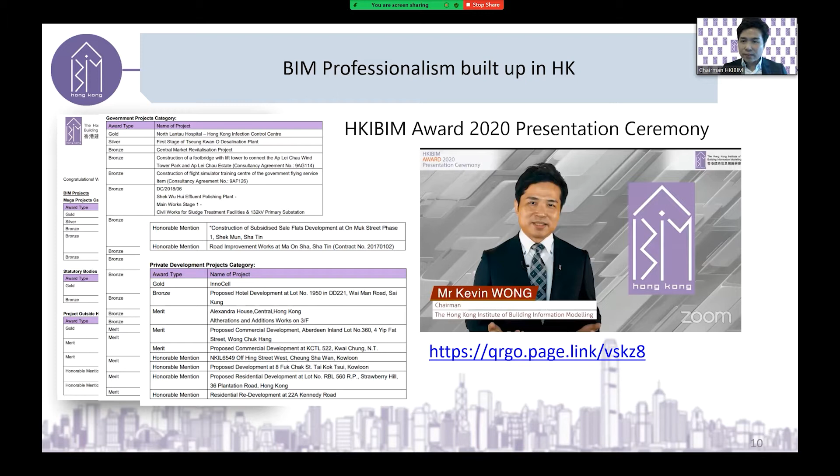This year we have a new application, so we call for applications now. We have a new award, the AEC Consultant Award, and also an Outstanding BIMer of the Year. If you think you are passionate in BIM, please apply, we are waiting for you. The nomination deadline is 26th of November, so hurry up.

We also provide continued professional development for the BIMers, with different events, so please have a look on our website and also our email.

Our board members this year: myself as chairman, my vice chairman engineer Dr. George Wong, honorary treasurer Dr. Jack Cheng, and honorary secretary Guan Tin. For information, Guan Tin is today's speaker as well.

I have initiated 5 departments this year: head of membership Benny Liu, head of training engineer Owen Lee, who is also the organizer for today, head of events and marketing Simon Ng, head of technical Ken Mo, and head of conduct engineer Francis Leung. We also have board members Monica Lau, Flocky Wong, who is one of our speakers today, TC Low, and Marcin Clausen.

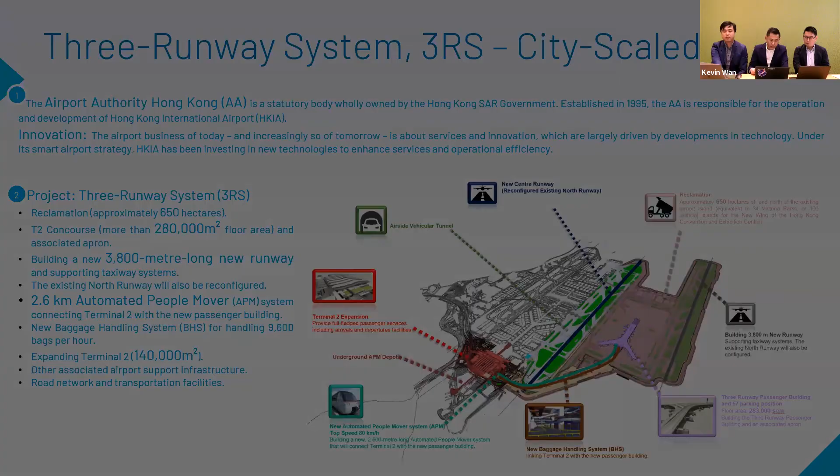I'll start with the philosophy of really focusing on people. From the client perspective, we are always concentrated on appointing, identifying, and then training our own internal teams. In terms of design or construction management teams, we have to start appointing all of these champions and train them.

A lot of these internal training materials we have planned out and crafted just for our design and construction management teams to be able to utilize any of these 3D software or online collaboration platforms to open up the BIM models and start reviewing it. So they are all beginner courses.

So we were taking the training, and then we were able to set up our own BIM training center, which is inside Terminal 1. Immersive cave systems, these were all generously borrowed from our IT departments, and associated video walls that we set up on site.

We have also designed and constructed our big rooms or war rooms on the construction sites, aiming to bring all the consultants and contractors to sit together inside the room and start to find the optimal solutions through visualization of all these 3D models and technologies.

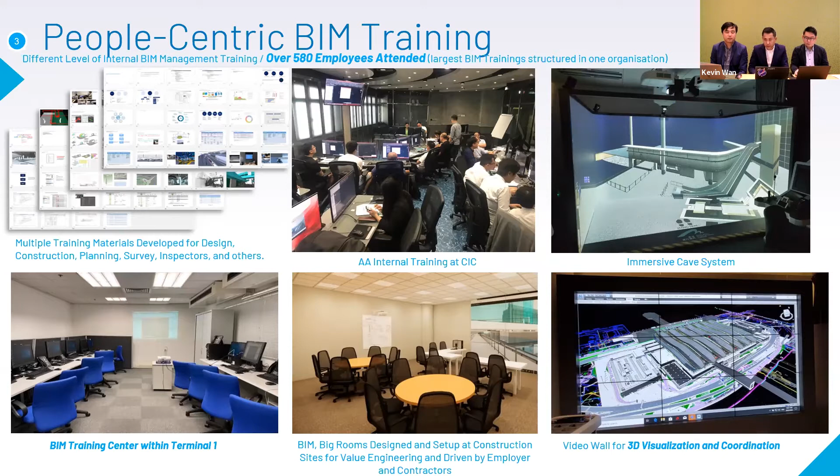For the start of every project, I believe clients really, one of the key options is to look into setting up the BIM specifications and standards. There's a lot of these BIM specifications and standards - there's local standards, there's also international standards around.

But what we have experienced is that in 2015, we engaged an external consultant to develop our BIM specifications and standards. These documents have been subsequently refined to reflect what was being stated in the technical circulars issued by the works bureaus.

And then for some of the LOD matrix, this is for the aviation industry. This is quite different from the BIM standards in terms of the LOD matrix, the level of developments, which is not easily referenced or found in local standards or international standards. For example, for baggage handling systems, how do we define the level of developments? This is something that we have to work by ourselves and start defining.

Item 6, in terms of contractual requirements, as a client, we have to be wary what we are trying to procure - the BIM scope of works to be delivered by the design consultants or the contractors. The scope has to be easily achieved by the consultants or contractors with adequate support.

We've got to consider how ready the market is in terms of milestones. How do we ensure that when the consultants and contractors hit particular milestones, they are submitting the right BIM deliverables back to the clients? We are mandating them to implement BIM, but have we really looked into what kind of BIM deliverables we want them to submit? These are all questions I think clients have to look into, so we can better manage or even assist and support our consultants and contractors.

Local standards, for example CIC and also all the technical circulars, including international standards like BSI 19650. So that's going to be a big exercise for us to align our BIM specification standards towards all these.

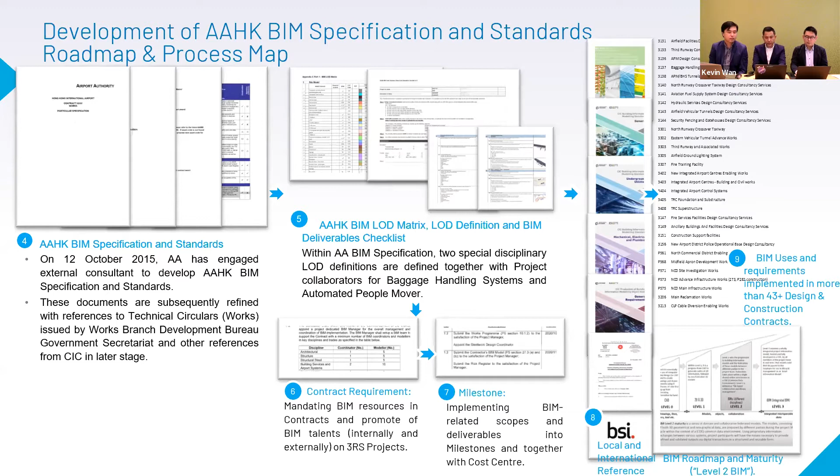Local and international standards. In terms of process mapping, I want to bring this up specifically to map how 2D flows and 3D flows are going to be brought into the projects. There's always confusion - we've experienced a lot of confusion whether 2D is contractual or whether 3D is contractual.

This is the key reason why we always map out, even for mega projects, each of these interface contracts - we have to map out the process of how the BIM models contributed by different design consultants get aggregated, how they get passed on to the contractor when awarded, where changes happen, who's responsible for updating it, who has access to the ultimate federated BIM models, where we're hosting this data, and what are the roles and responsibilities of the in-house client's BIM team versus the scopes for consultants or contractors' BIM teams. This all has to be mapped so the design and construction management teams are able to understand.

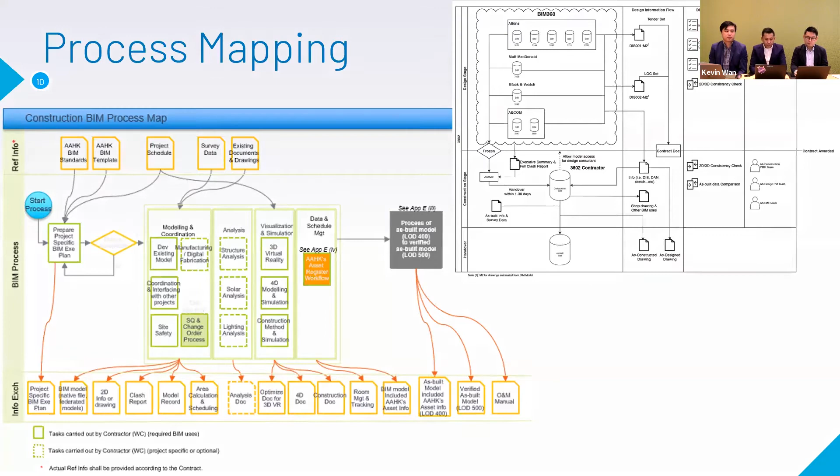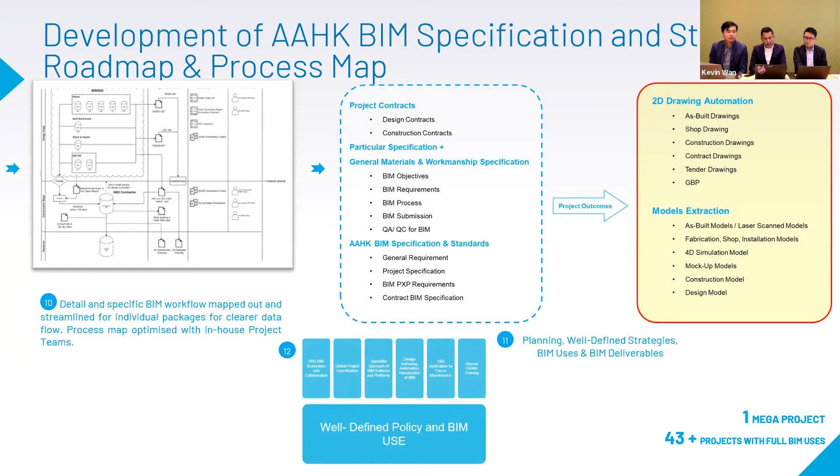Nothing complex - the process map has been around in the market for some time. With the map process, in terms of contracts, we define whatever scopes, requirements, and key objectives. So with fingers crossed, we're hoping for the best outcomes and the best BIM deliverables to be delivered to us by our consultants and contractors.

2D drawing automation is always something we hope makes the 3D models and 2D drawings consistent. We're going to be realistic - we're not generating all the 2D drawings from the BIM models, but there's a minimum amount of effort and a minimum percentage of drawings - general building plans, key sections - that should be generated from the BIM models. We have to ask ourselves what kind of drawings: shop drawings, fabrication drawings, and different drawings used during the design, tendering, and construction stages.

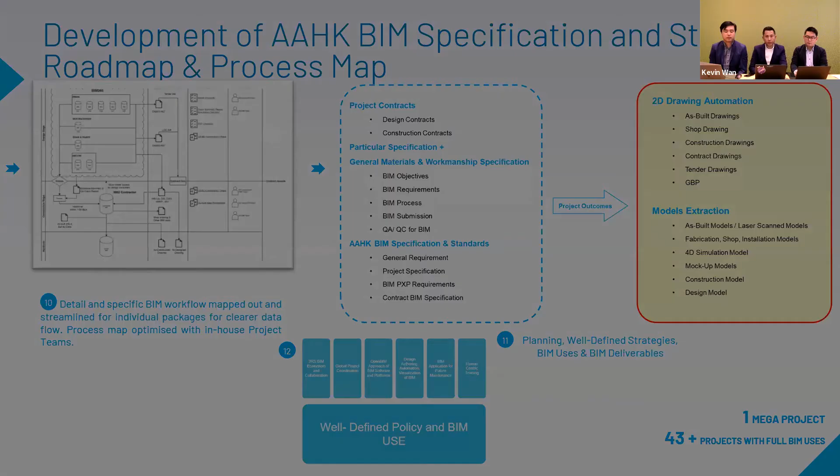With all of this map process, contract, BIM standards - these are our client-defined BIM policies internally. It works for owners, consulting firms, or construction contractors' teams. I think we have to start standardizing our own BIM specifications, our corporate BIM standards, and so on.

Some of the technological backbones and cloud technologies we are utilizing on our projects: Revit, Tekla, SketchUp, all the APIs, all the plugins.

Really, the reason for setting up a BIM team within the client is not really to micromanage every BIM team of the consultants and contractors. I think one of the key roles of a client's BIM team is to support the design consultants and contractors. We want to understand their difficulties and be able to hold hands together and start resolving issues.

So we'd like to look into a more open and collaborative process - this is something we really recommend all clients look into. Common CDE that we are adopting - nothing strange or too different from the market. We are using BIM 360 for all trades except structural steel, and we are using Trimble Connect.

For digital work supervision systems, this is another requirement issued by the Development Bureau a couple of years ago. We are adopting SnagR for DWSS - the advantages are paperless, user-friendly, and efficient. For the cloud works, they could just go out to site, take photographs of whatever pipe has been laid down on the construction site, do the invert levels using traditional or advanced surveying methods, and then start uploading the images onto the platform itself.

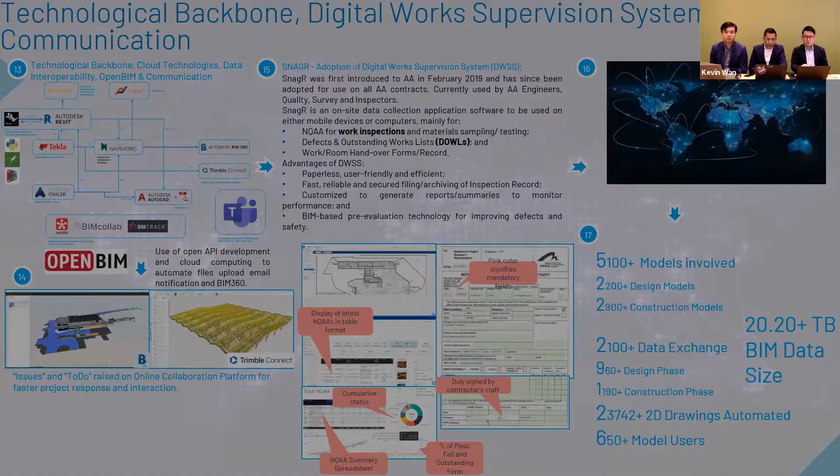BIM uses construction simulations, 4D simulations, engineering analysis, construction documentation. In terms of all of these BIM models, we are looking into how these 3D BIM models can be extended from the design to the construction phase, right?

We have to look for different scopes. For example, analysis that requires 3D joint generations from the BIM models or automations, for visualizations and shop drawing generations for MIC or DFMA, using the BIM model data itself for robotic total stations, setting out 3D control and plannings.

BIM-based quantity extractions, for materials that we think will be mostly remeasured. It's just so hard to run through the 2D drawings and remeasure it there. And then site monitoring, as-is condition modelings, using 3D laser scannings.

These are all the BIM uses, and we definitely are adopting full BIM use for the projects, and clients from the senior management perspective. Although we want to adopt full BIM use, the BIM use has to be practical, right?

It has to help the project teams in terms of project delivery, in terms of time, and how easy the contractor is going to use it to deliver their works.

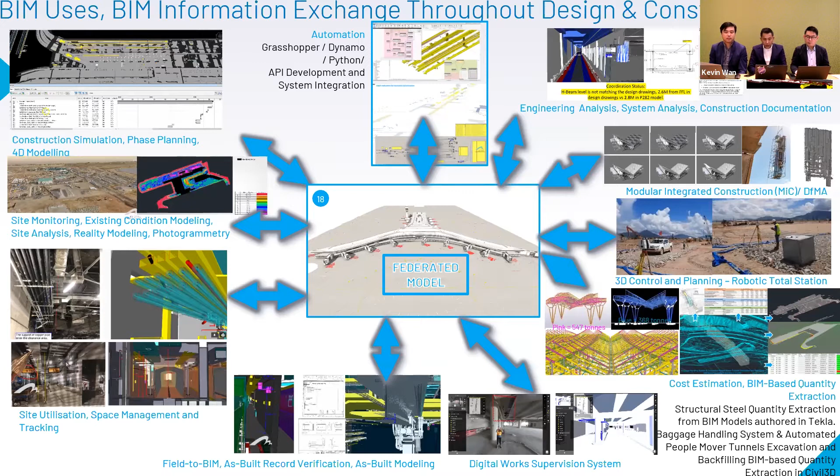BIM-based cost estimations. I think what we have seen and experienced is the majority of the models are being used to calculate the excavation volumes, the cut and fills, and steel quantities, where these steel detailings and the quantities are going to change, right? So this will all be measured, and I think one of the key strategies is to really identify a trial area or a key area.

If the clients are wary of doing full implementations of BIM, the recommendation is to really look into a trial area to start measuring the quantities of a certain material. And that material often requires us to remeasure in the construction stage.

So, for example, steel has to be remeasured. So it makes perfect sense to really measure it in 3D and export these quantities.

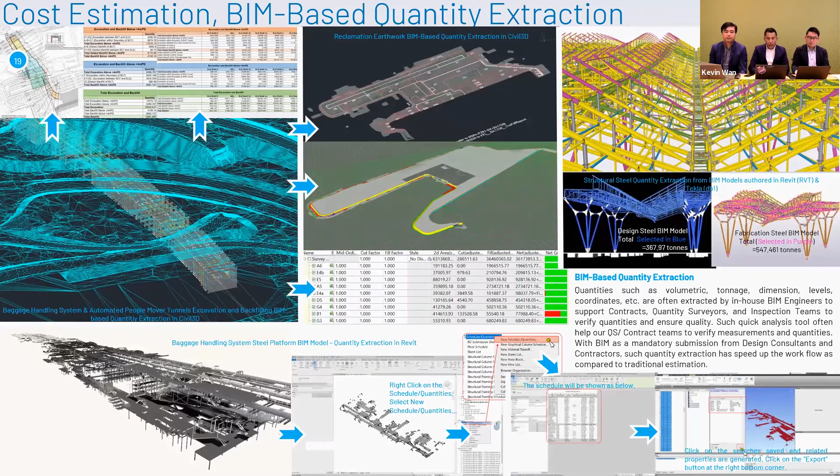In terms of this BIM model, all our great BIM modelers are putting effort into building really good models. How are we going to bring this data out to the field to help our contractors, right?

So one thing that we are hoping to see the construction teams do is implement machinery controls, how they input the data from the output of the BIM model itself and then import it into these machine controls.

So for example, one example of this is the BIM model itself is done in Civil 3D, and this Civil 3D was used to generate grading plans, cross-section drawings, elevation drawings for each layer. So this BIM corridor model was being used and imported into these machine controls and these paving machines, right?

The hardware itself comes with all the sensors, all the radio with all the right frequencies. Again, you need a universal total station to make sure that the paving machines are working in the right alignment. There's also targets that has to be installed. So this is the basic hardware for all the positioning systems.

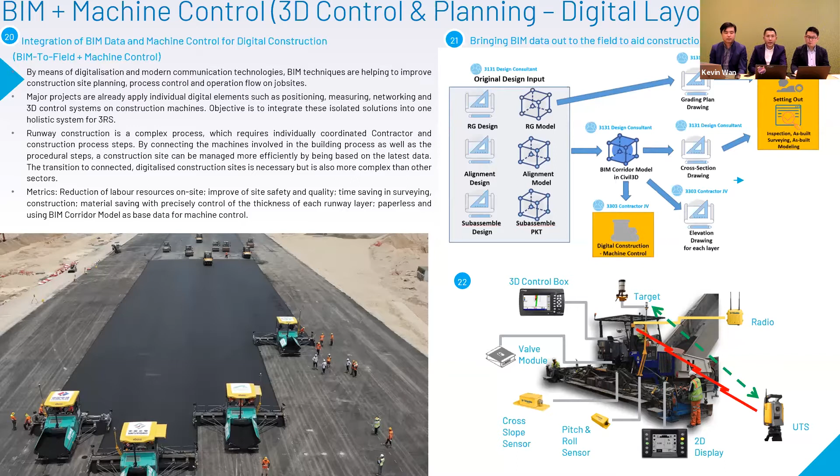This is what we meant by really bringing out the BIM data to the field to help the contractors. How do we capture the as-is conditions back to the office, right, to verify our design intent or construction BIM models, right? So again, this is what we are using laser scannings to verify.

There's also a lot of effort that has to be inputted into implementing laser scannings. One, you have to do site survey and data acquisitions. Once you're done with the survey teams, you have to bring the data back to the office. You have to geo-reference it. You have to process the point cloud, and then start overlaying the point cloud models to the design models. So again, this requires manual operation of bringing out the equipment to the site for laser scannings using different targets.

There's also a requirement of software and hardware to process the point cloud models and then overlay it. So we've got to understand the workflow, and definitely the construction teams and contractors are putting effort into this. Reality modeling, nothing new.

This is just another friendly technology for using drones and photogrammetry. But FYI, it also requires quite a lot of resources to put all of this model together, to stitch all of this data so that we can visualize it.

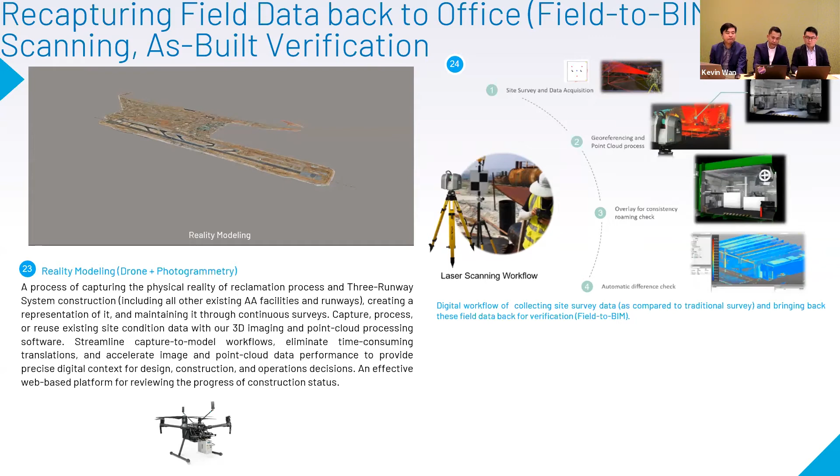In terms of underground utilities, this is mandated in the projects so that we can verify the models. We're not looking for millimeter precision - I think with enough tolerance so that geometrically the elements are there. We're just checking whether the elements are there.

And on item 26, with the workflow of showing all the point cloud models - why are we collecting all of these point clouds? There's actually an intention to use it all the way for GIS and asset management, which will be covered by Floki in detail shortly.

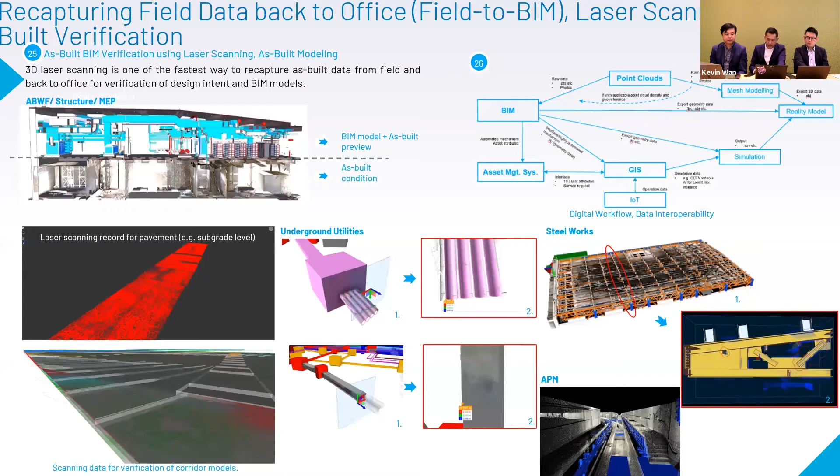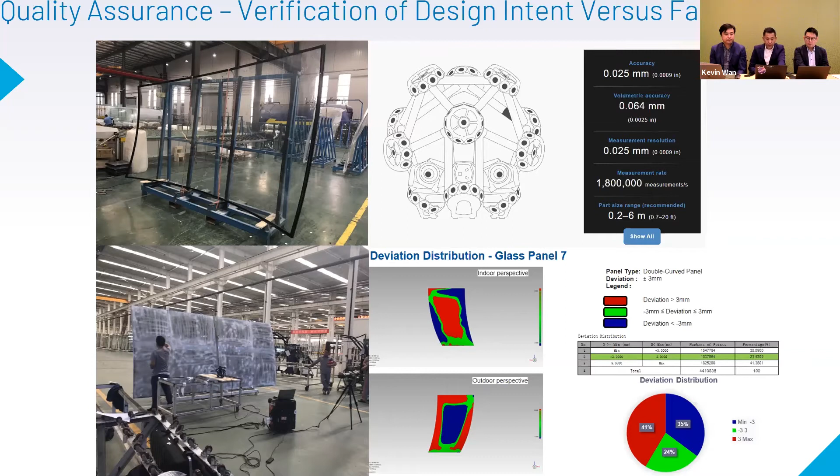Other quality assurance we can look into is recapturing the data using laser scanning - high precision laser scanning for specific construction materials where we want good geometric control. Once this is collected from the fabrication stage, we can use it as a QA/QC method - for example, the glass and glazing for curtain walls. Before it gets shipped out from the factory, we can double check whether the geometry fits into our design intent. This actually helps us save costs rather than shipping out glass from the factories.

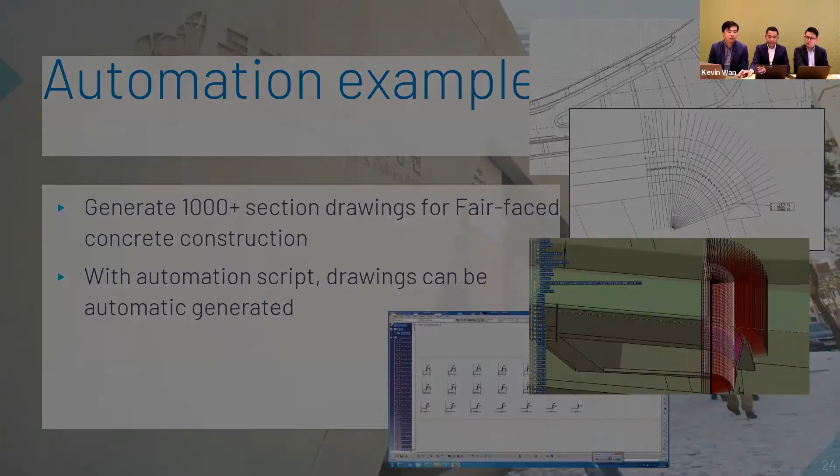So the contractor on site could have very accurate drawings and fabricate those formworks, then construct the fair-faced concrete on site. We had a script to automatically generate those drawings, so no matter if they changed the design 10 times or 1,000 times, it didn't really matter because we already had the full workflow and scripting to automate those operations.

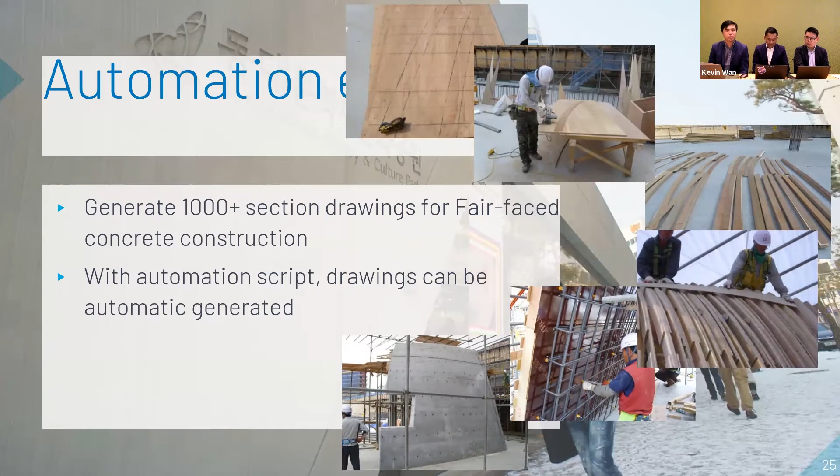The second project I want to share is another from Zaha Hadid, located in Changsha, China - the Meixihu International Culture Center. Same thing - digital models to fabrication. This time we were more advanced, directly fabricating those GRC panels using CNC machines to form the formwork. It's a step ahead from the previous project, but still using automation.

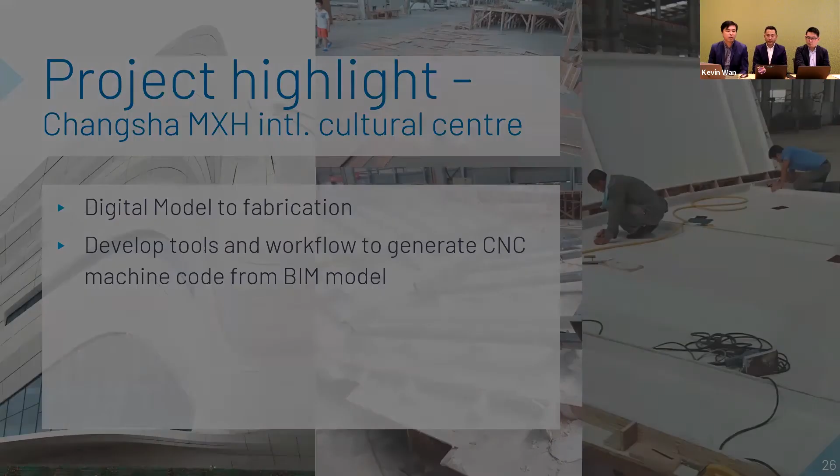As you can see, those digital information was directly fed into the machine so they were able to automatically fabricate those formworks in machine language - we call it CNC. So why am I showing these two projects? From my perspective, I believe automation, or the automated workflow, is the next generation of our BIM workflow.

The automation or the automated workflow is the next generation of our BIM workflow.

From my perspective, we only have two decades of the BIM industry here. Those software or workflows are not that sophisticated yet. Sometimes we have to reinvent or change some of the workflow to suit our project needs. Many projects outside of Hong Kong or internationally will develop their own workflow tools or automation to suit their needs. So I think as a BIMer, this kind of skill set is very essential for the times after this.

Let me start my topic, which is about the construction phase from the current perspective. First, let me introduce our team. We are more focused on the construction phase of the project, but we still have management from design, construction, and also the O&M stage, which Fokke will mention a little bit more about.

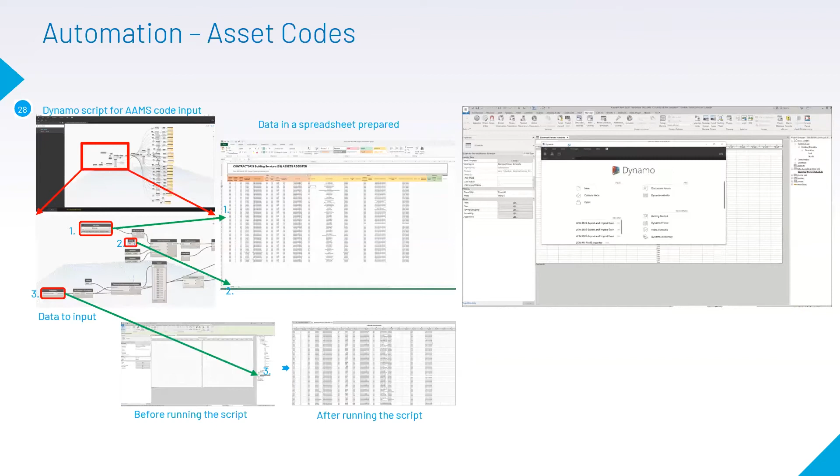Here is an example of the automation of the asset code, which was developed by the contractors. So we are not only working with our team in-house, we also help the contractor or the consultants do their things quicker, smarter, and more accurate.

Here's an example developed by the contractors with a script, as you can see, a Dynamo script to help input some of the asset management data into our BIM model, which is a very large amount of human text input. If we can automate that, it can save the contractor's time. Actually, it's not our time, but if they can save their precious time, then maybe they can use it in a better way to provide a higher quality output for us.

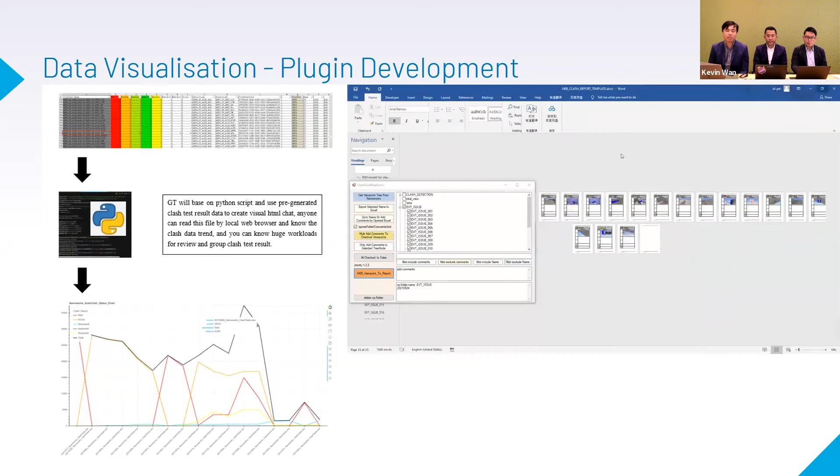Here's another example, which is we will generate those clashes' report, a viewpoint to automatically generate a comment sheet or report in Word format. It's the same philosophy - we believe that if we can help the contractor save their time and money, they may provide a better deliverable to us.

Cloud, tablet, and model. In the department we are also seeking new possibilities, which include not only software but also hardware. For example, those BIM stations - we all know they are very expensive with very high configuration. So we have an idea that it could be put on the cloud and shared by all parties to save the cost. Let's say if we have a very high-end computer for each member, is it possible that we can share the computer with 3 members, 4 members, or 5 members?

Or those people who are viewing the model in the department but not using it on a day-by-day basis - can we share that with them? Maybe 10 people share one computer on the cloud. So we are seeking the possibility of the virtual desktop. And also Holo Builder, one of the applications that works with mixed reality - we are also seeking this possibility for us.

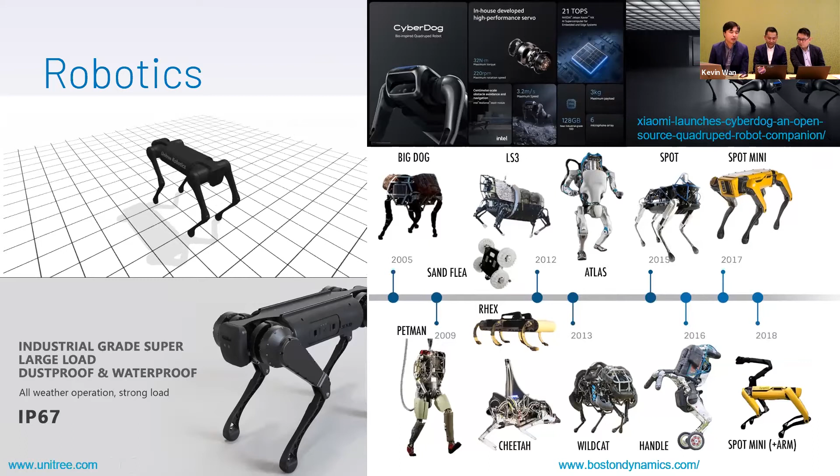Robotics, one of the very hot topics nowadays. Also from the China manufacturer Xiaomi, they have a new CyberDog which you can buy at a very cheap price, less than one private car's price, then have it at home and develop your own tools to help. For example, maybe they can do some investigation, sidewalk inspection, or some logging, etc. The possibility is unlimited, so we are seeking this new technology as well.

So the next topic is about in-house development. I would like to introduce 4 examples from our developments that we want to share with you guys.

The first one is about the Power BI clash report dashboard. Many people say, oh, Navisworks can do the clash, why do we have to do so many things and put it in Power BI for reporting? This is because from our BIM professional perspective, we truly understand what the Navisworks clash report means. But can the client understand? Can those colleagues without BIM knowledge really understand the Navisworks clash report and what it means?

Another problem is when top management looks at the project's clash numbers, usually the contractor or consultant will just report, oh, we have 10,000 or 100,000 clashes. That will really scare them because they're talking about so many clashes in one project, but actually those are just numbers - you didn't tell them what's the meaning behind those numbers. Some of them may not be important, some of them may need to be solved right away.

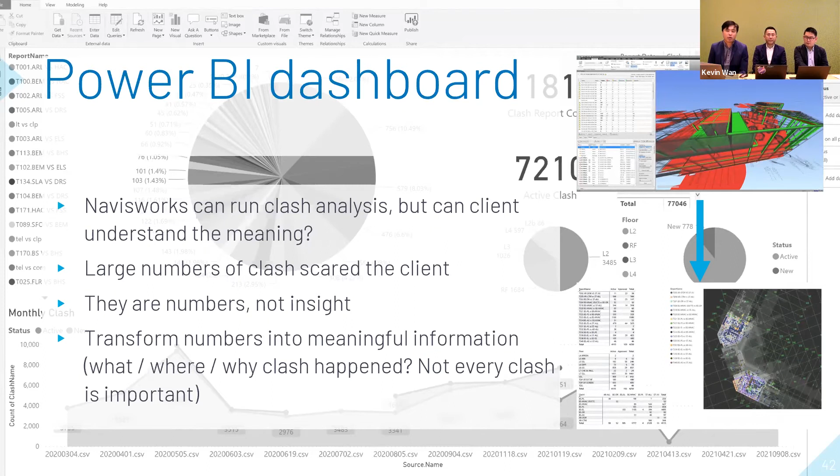So we are going to transform those numbers into a Power BI dashboard, where the parties can interactively look at the numbers and understand their meaning. For example, they can navigate themselves to see what discipline, what floor, and where the clashes are, in a very intuitive interface powered by Microsoft Power BI. So they are able to look into the report and see what, where, and why the clash happened, and which ones are important or not. They are able to do interactive reporting using Power BI.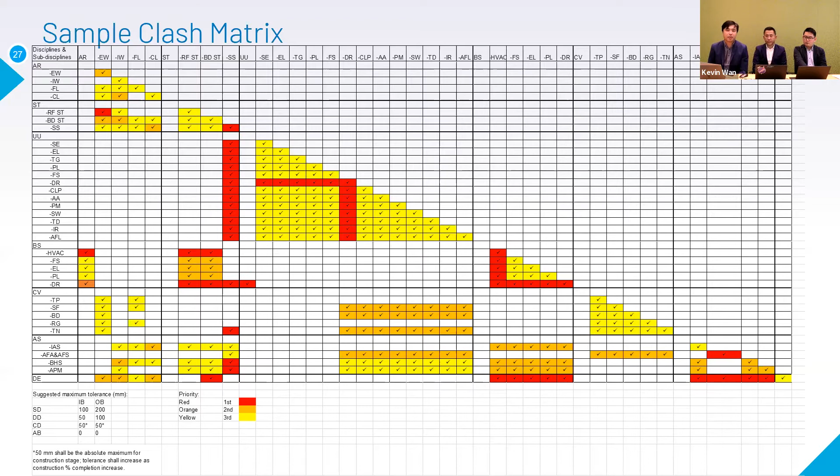And the tools automatically grab the Navisworks clashes and then generate a report, so our high-level management or the project manager, without BIM knowledge, can also understand what those numbers mean - not only the numbers, but the insight of the project.

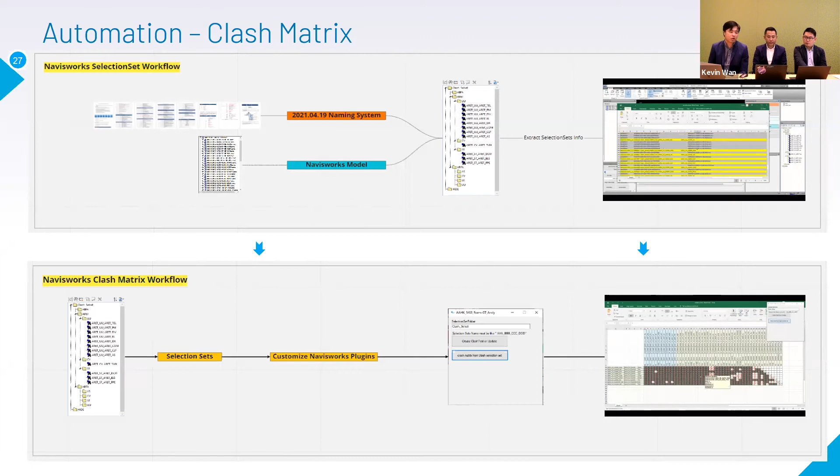The next stop is about the model comparison tools. The second question we usually ask ourselves when receiving the model from the contractor - we're receiving it on a bi-weekly basis - is what did they do? What have they done in these 2 weeks? Are they modeling in an appropriate way?

Because in the BIM world, we are promoting a parametric modeling methodology. So that means when you model something incorrectly, you should change the parameter, not delete the object and remodel it again, right? Most of the cases.

So we have in-house tools which check 2 versions of the model and highlight them with different colors. We can see which element was newly created, which ones were deleted, and the before and after of their geometry in the 2 versions of the model.

So from the model, we can tell a few things. First, how much effort they put into their model, how many objects have been updated during the time. Secondly, about the modeling quality - are they modeling using the proper methodology? We can tell about this. These are the 2 reasons behind why we developed these plugins.

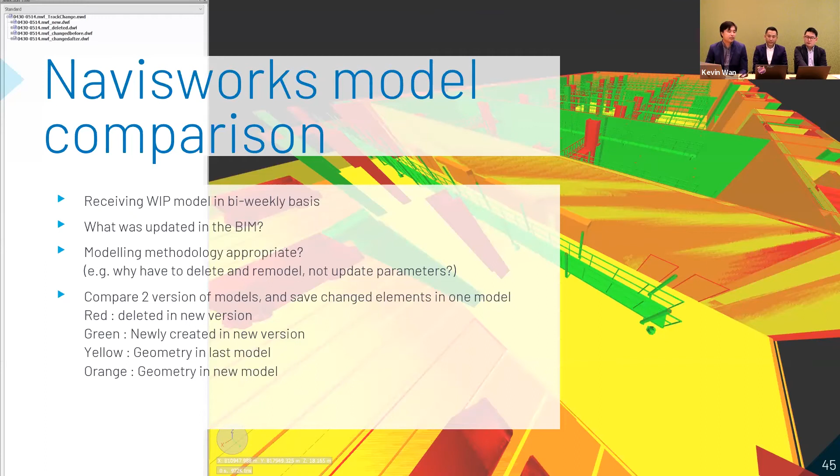Let's talk about CDE notification and synchronization. CDE, common data environment, is a very hot topic in the BIM industry for these few years. In our project, we have a CDE for each contractor. As I said, we are talking about 20 to 30 projects simultaneously, meaning they have 20 to 30 CDEs together submitting information to us.

So for us, it's not feasible to spend time checking their CDE to see any updates on them every day, on an everyday basis. This is the first problem we have encountered.

And the second problem is, if we only rely on the CDE from the contractors alone, we ask the question - what if their CDE fails? Here are 2 examples. The first one, some contractors forgot to extend their service, then the service was suddenly stopped, and we lost all the files on the CDE.

We cannot access them until they pay to reopen the account - maybe they can, or maybe they cannot, right? The second experience is that the BIM consultant on the project suddenly disappeared and closed down the CDE, and we lost all the files as well.

So these 2 examples brought our attention to the need for a solution or workflow where we have a backup copy or local copy ourselves, not putting all the eggs in one basket. So in-house, our team developed several scripts or workflows to work with the CDE.

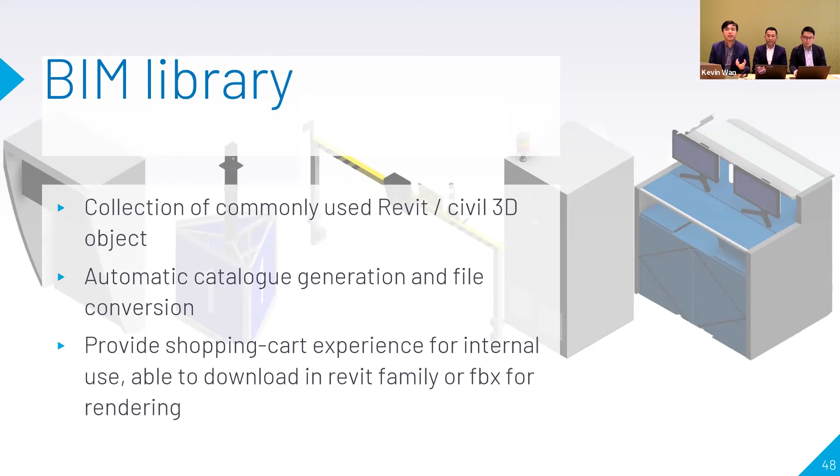And the second one is about Slack. It's a team collaboration tool, like a chat room. We can check in and talk about our daily work and the problems we encounter in Slack. We use this because we want to separate work-related conversations from private conversations, so we don't talk about work in WhatsApp.

And the last one is about Trello. Trello is a very important tool for our team because it's related to knowledge capture and sharing. In our daily work, we encounter many problems or questions. So when we find the answers or solve the problems, we log it down with Trello cards. So when we have new colleagues, or people encounter a problem, they can search it themselves and learn how to resolve it without having to deal with the problem again and spend a lot of time resolving something we already fixed.

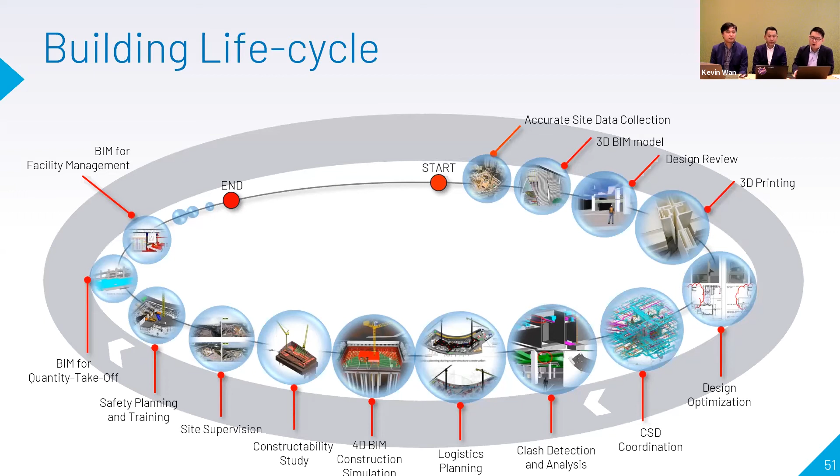We are talking about the building life cycle, and as you can see in the figure, the operation and maintenance phase takes a significant portion of the whole building life cycle. O&M includes functions, duties, and labor-associated activities of daily operation and routine maintenance - works such as replacement of parts, structural components, and other activities needed to preserve assets, so that the building continues to provide good service and achieve its life and reasonable maintenance costs.

To achieve this goal, facility clients commonly consider aspects like reducing capital repair, reducing unscheduled shutdown repairs, extending element and equipment life, and realizing life cycle cost savings.

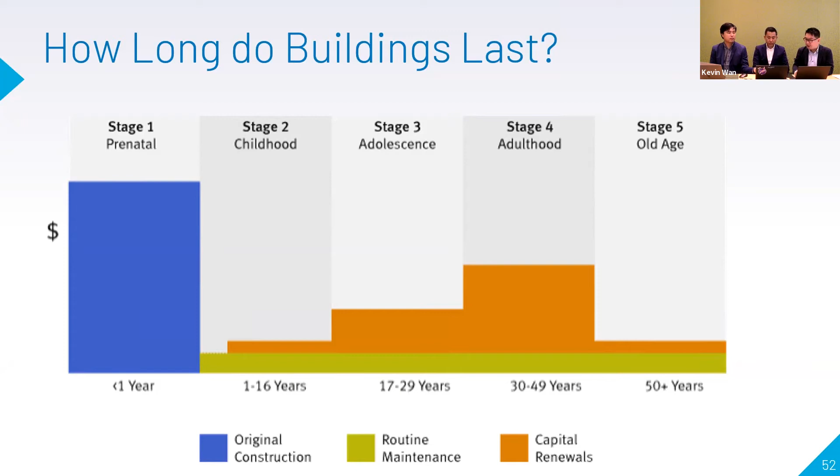Including Hong Kong, many countries in the world are considering the value chain of the built environment and making use of building information modeling and digital twin - the digital replica of the physical world - to enable assurance and feedback throughout delivery and services. For example, in the UK, the government established an Infrastructure and Projects Authority to manage policy, standards, process, and data from building construction to the built environment.

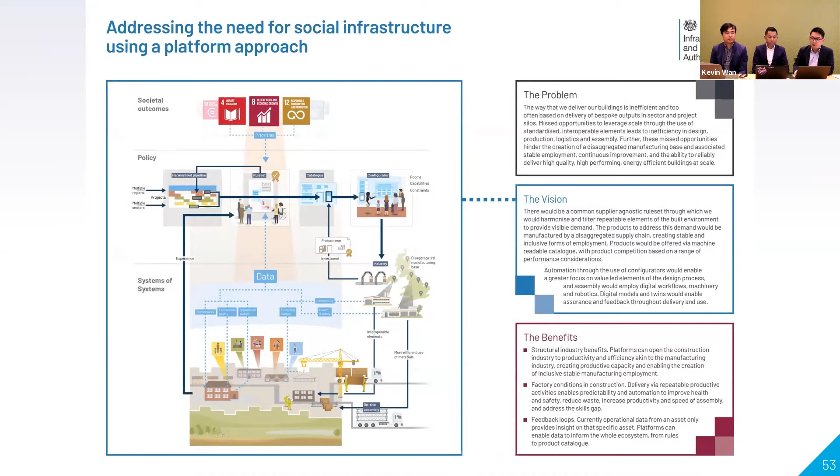Next I will talk about BIM in FM. In common practice, the facilities management team has to handle the building management system, which we call BMS. This also includes the central control management system and computer-aided management system, CCMS and CAMS. Another aspect is the asset management system.

You can imagine that in a building there are a lot of assets, and that asset information includes asset attributes, cost information, inventory records, work orders, spare parts, maintenance records, etc. If the client can make use of the geometry and information from the BIM model and associate it into a building maintenance management system, this integration enhances the usage of facility operation applications.

All activities associated with routine day-to-day use, support, and maintenance of a building or physical asset happen in the O&M phase of construction. The client representative shall be responsible for managing resources that affect cost and services, including safety, reliability, and performance.

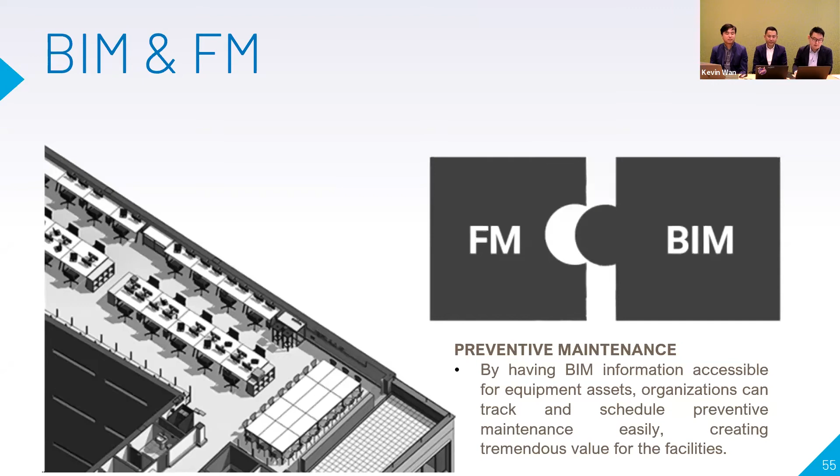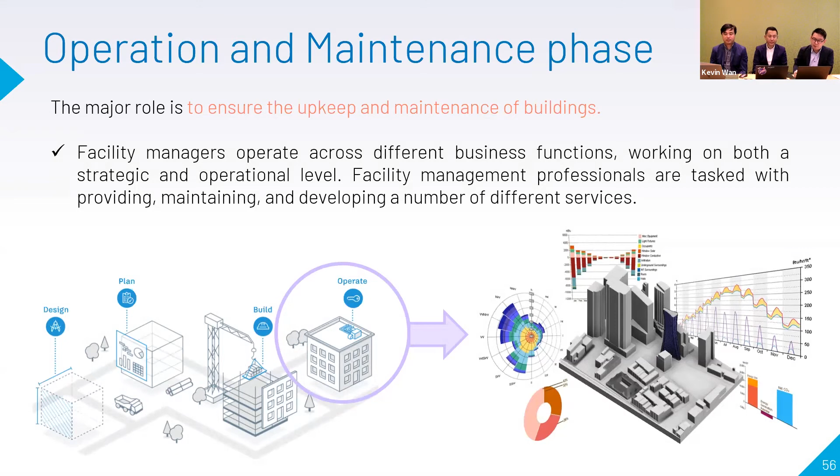From the client's perspective, facility management is a professional management discipline focused on the efficient and effective delivery of supporting services for an organization. The project owner deals with facility management, including maintenance and repair, and physical assets. In the client organization, the management team is responsible to plan and manage the procedure for collecting asset data throughout design, construction, and operation. For example, building maintenance, test and inspection, building administration, and facility management planning, etc.

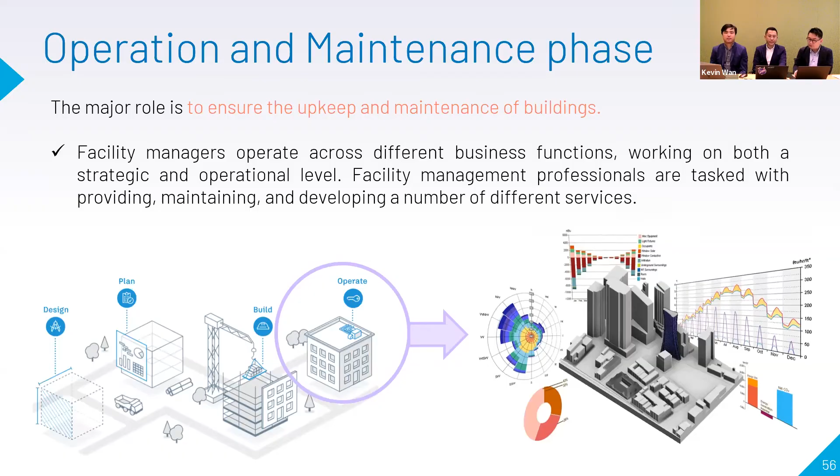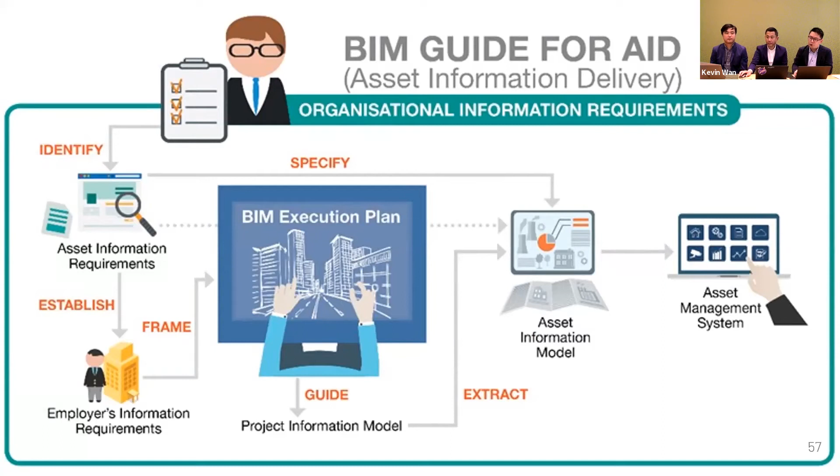For the client to get information from the design stage, construction stage, through to the O&M stage, we have the CIC BIM standard and ISO 19650 that elaborate on the life cycle and the procedures we have to follow. As a client, they always have their own standard that allows them to align with their own FM system integrations.

The client BIM standard will always consist of the organizational information requirement (OIR), asset information requirement (AIR), project information requirement (PIR), and exchange of information requirement. The OIR is to clarify the organizational needs and objectives. AIR is a key one - it's all about the requirement of the asset and the management and maintenance procedure for those assets.

Next I will use this figure to elaborate on what comes next after we have the BIM model as a client. Throughout the design, build, and construction stage, we will have the BIM model. But it's not the end, because we will still have a long operation time for those buildings and facilities. So we need to integrate all that building information with asset information and operation data, so that we have the whole information throughout the whole building life cycle.

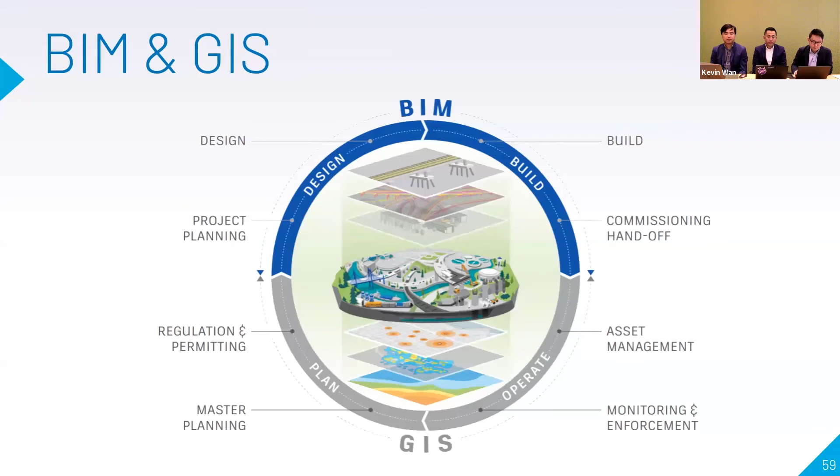Integrated facilities - to improve operation efficiency, the integrated facility solution is considered to help the project owner. It can support service requests from the FM and operation team, improve productivity during the operational life cycle, and securely manage the maintenance contractor and consultant asset and asset information, etc.

By integrating BIM with the existing information, or historical information, or live information of the building, we will be able to enable this integrated facilities approach, making use of all that information in the digital replica.

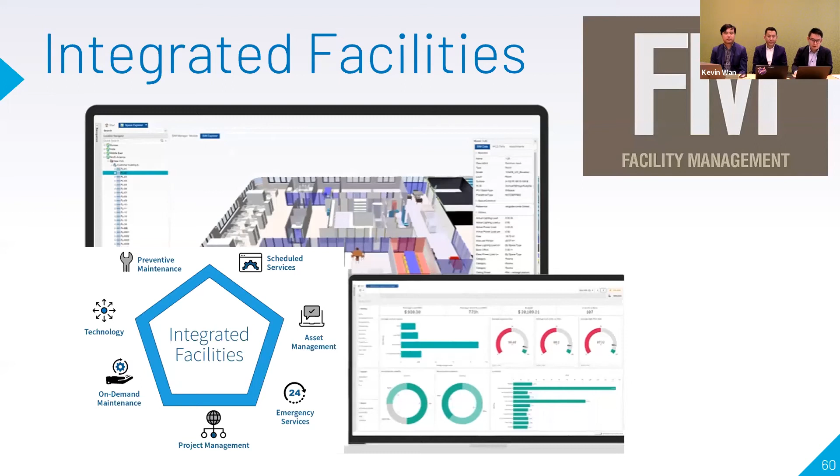For the information, we normally divide into two types. One is static data, including historical records like asset information, maintenance records, land use records, etc. The other is dynamic data, including IoT sensors, operation technology data, and open source data.

This slide also clearly elaborates what I just mentioned in the previous slide - GIS for management, the view of data with reference to a specific geographical location. In fact, spatial data has long been integrated into our life. We can use the map application on our mobile phone, for example, combined with GIS, to locate a nearby restaurant.

In different cases, in a building, you can use IoT and also make use of spatial data to locate your toilet and understand how many occupants are there. By making use of the BIM asset information model, for example connecting BIM to IoT data, the information collected into the application will greatly facilitate facility managements in their daily operation.

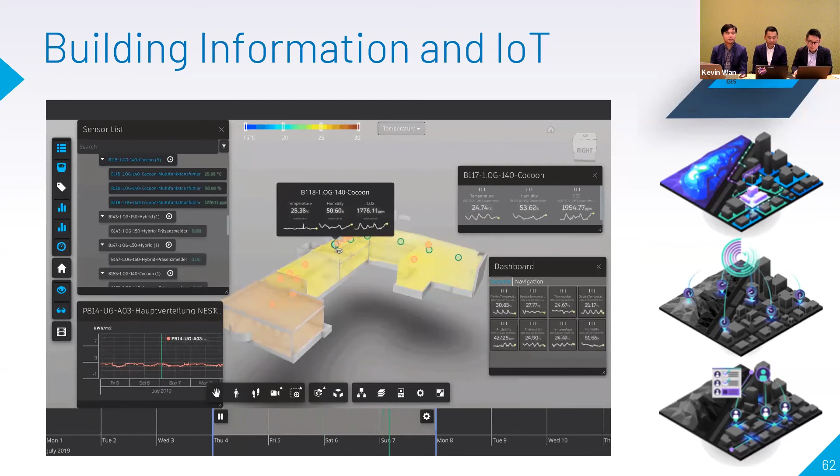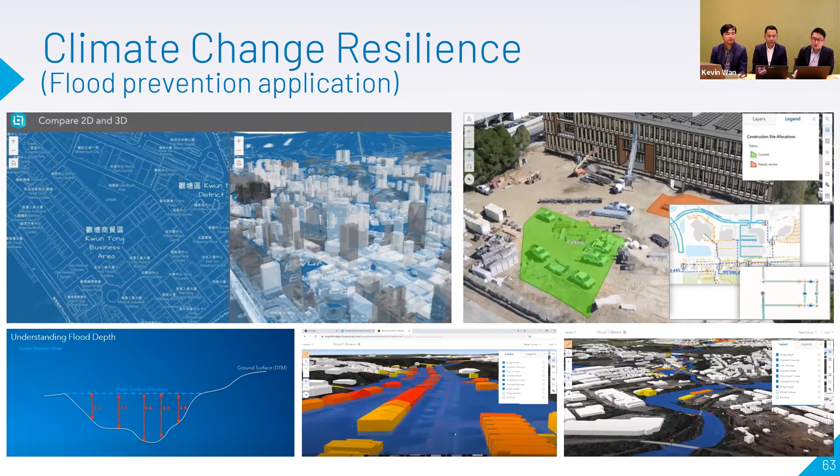Adding the Hong Kong Observatory information about weather, you get rainfall and other data, so you can combine open data, IoT, BIM model, and city-level GIS model to simulate these cases and do prediction. So for the owner and developer, it's a trend for them to make use of this information for their planning.

Then the application to facility managers will be significant. It will enable them to monitor the fault, the system performance, and the maintenance performance as well.

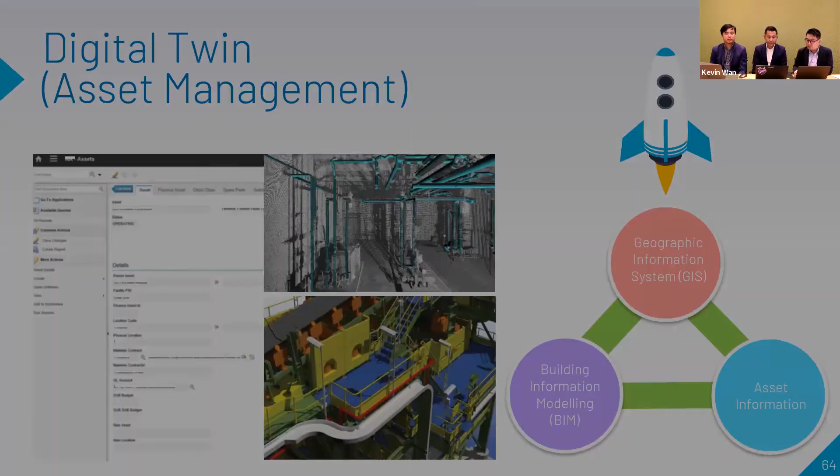So I will introduce the holistic management of facilities. With all this information ready, it's no longer limited to paper-type workflows and spreadsheet-type information collection. We can make use of geographical information systems and building information modeling for facility management.

As I just mentioned, it's very easy to create a dashboard using a spreadsheet. We have our office, and we can open it and plot out all the data, but managing that data and integrating the system is difficult. So I took this reference from the Hong Kong government.

The COVID-19 pandemic affected Hong Kong greatly. Information including status, numbers, locations, and details were published online. In the GIS, the geographical information was visualized on a map, sorted so that the public, without specific knowledge or training, could easily make use of this dashboard.

Here we have two short videos showing that with GIS, we can create more information, not only for the building itself, but also to facilitate government city-scale level planning. As a project owner, it creates more opportunities for innovative solutions for better facility management.

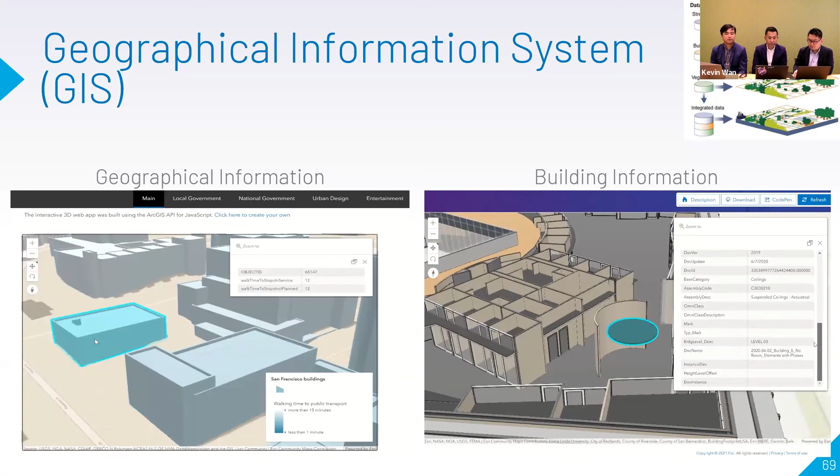So here is just a slide showing that if anyone is interested, you can go to the planning department and download the 3D map. It's free and available online.

About the digital twin, people may ask what is a digital twin? Actually it is a twin with physical assets, like the BIM integrated with GIS. Then we can call it a GIS-centric digital twin, or digital twin. This enables the link to O&M and provides instant access to quality-approved asset data, accessible in the field for FM engineers and maintenance teams to use.

Although we know the BIM process helps planning, design, and construction, in view of smart city initiatives in major countries, I believe the BIM model is not going to stop at planning, design, and construction, but also formulate a foundation to enable a digital twin for smart cities.

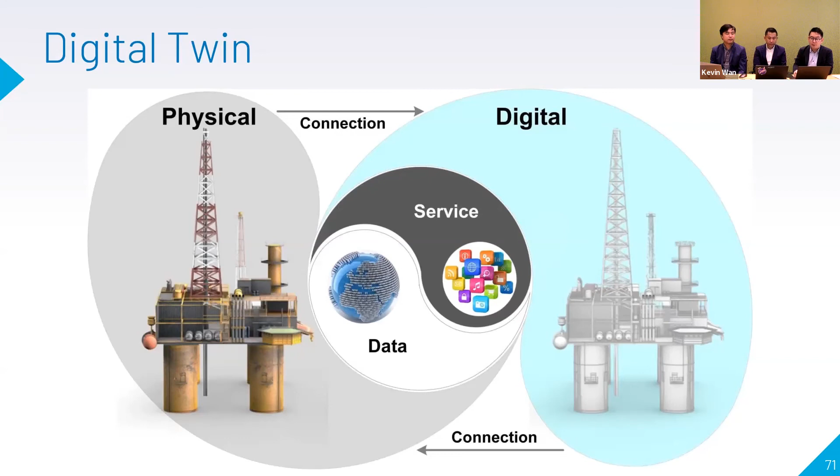Coming to my last slide. Concerning the digital transformation to effective FM, it includes the ability to achieve real-time access to accurate information on building facilities. BIM for facility management represents the highest level of BIM maturity towards the digital sustainability of the intelligent built environment.

All these new processes and technologies hold potential, but it depends on how much synergy comes from the various stages of integration. Can the different stakeholders across the design and construction stage contribute to better delivery of the BIM model for FM? My answer is yes. As BIM for FM is relatively new, adding it to the traditional FM process means rethinking how the team works together. This transformation is evolving practice and changing in ways that have significant meaning and value towards building a better, more efficient, innovative and sustainable environment.

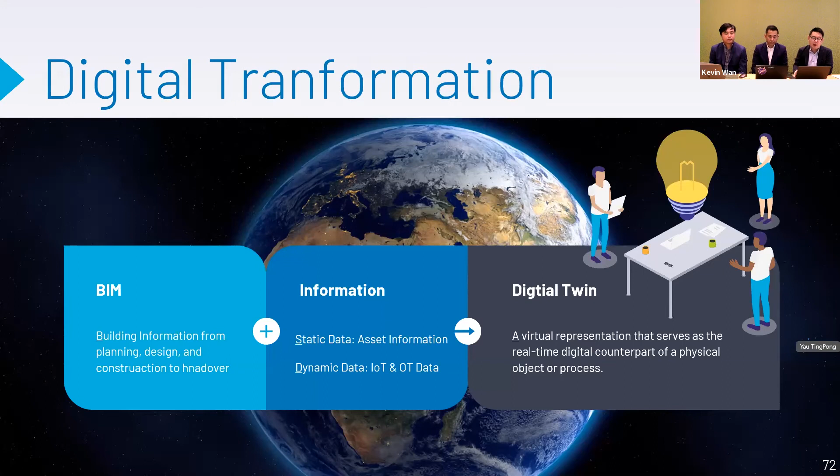Last but not the least, as a client, I would like to share with you the difference between service and experience. Service is what customers expect, but experience is what they discover, unexpected, sustainable. It shall rely on all of us and our contributions to transform our AECO industry to achieve an excellent experience in construction and built environments. This is all my slide. Thank you.

Thank you, Guan, Kevin, and Focky. Okay, thanks a lot, yeah.

We now move on to the Q&A session. If you have any questions, please feel free to raise them in the chat box. We have already received several questions. Let me show you the questions. The first question is: in the construction phase, how can project information models and related metadata produced in the common data environment be smoothly integrated into the CAFM, the computer aided facility management system, in airport facilities? What types of file formats of the PIM are suggested to adopt for handover? What is the Level of Information Need from such a CAFM system?

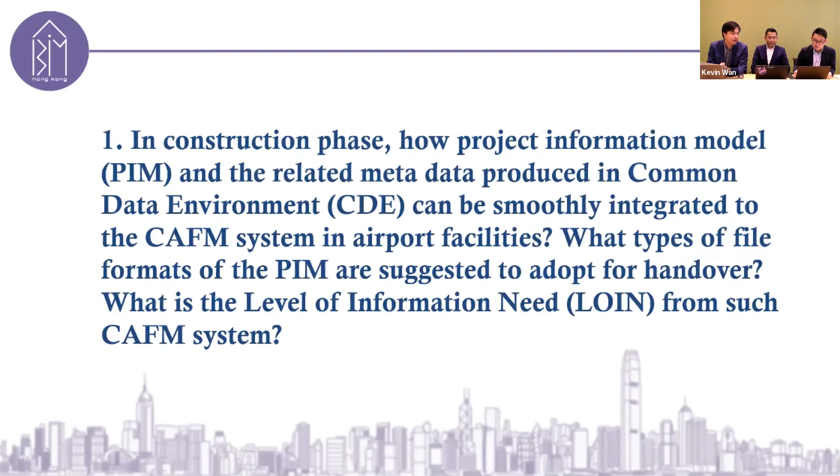Okay, thank you, Kevin. The second question: I'm working in a modeling team. I find that creating an automated process for modeling, documentation, production, and model audit seems amazing but difficult to kickstart. Is there any suggestion that makes it easier, so that most BIM modelers can use it without headache? Is there any local community group where we could get free resources for that?

Maybe I can start with the answer. I think you don't have to go to a local community to get free resources, it's all on the internet. You just Google it and you can find tons of information, videos, tutorials, etc. You can learn it by yourself. But one thing I want to mention is that for automated processes, if you use them, you may find it very exciting and useful, but for developing them, you need to put in effort. The effort is about basic programming language, because you may have very strong knowledge about geometry itself and Revit and BIM itself, but what is the mechanism behind controlling those elements? How can you link them together? So you need some software programming basic knowledge to understand how to connect those elements together.